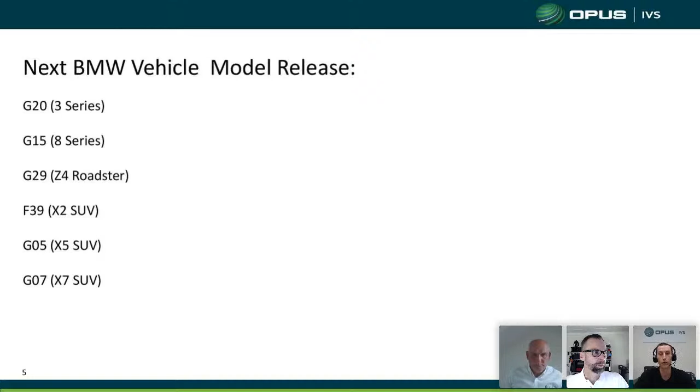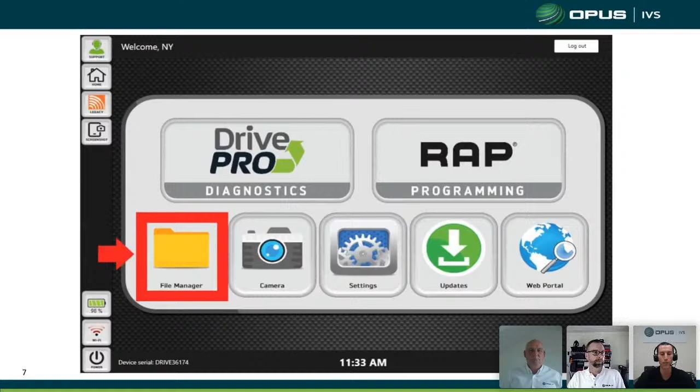Another question we've been getting a lot has been with regards to CIP. CIP is done through the legacy software, again that small orange button in the top left. Once a CIP order is created for a programming file, we go back to the main screen and go to File Manager. That's where we send and download the orders we've created through CIP.

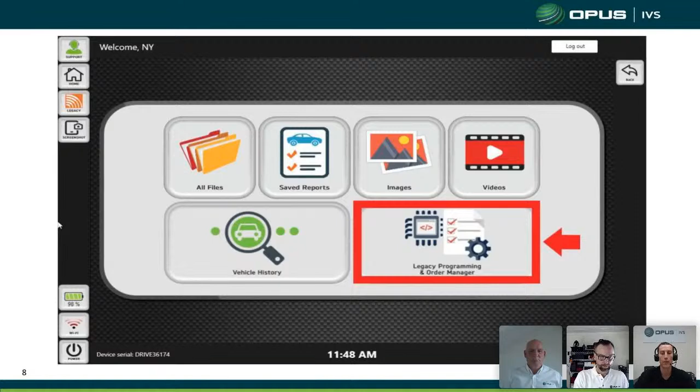Brian has kindly added some slides to walk us through the CIP process for both the E chassis and the F chassis. A lot of them will simply be prompts that you guys can read and follow, but we'll cover some of those now.

As we go into the CIP menu, there's going to be some confusion on the customer's end about what to do in terms of programming or coding possibilities. With the DrivePro ES, as well as our legacy tools BlueBox and AssistPlus, we have options: coding or programming an individual control unit, programming or coding a selection of control units, and doing a complete vehicle programming or coding event. The latter should pretty rarely be used, in all honesty. Primarily, you guys will be using the individual and selective coding and programming options.

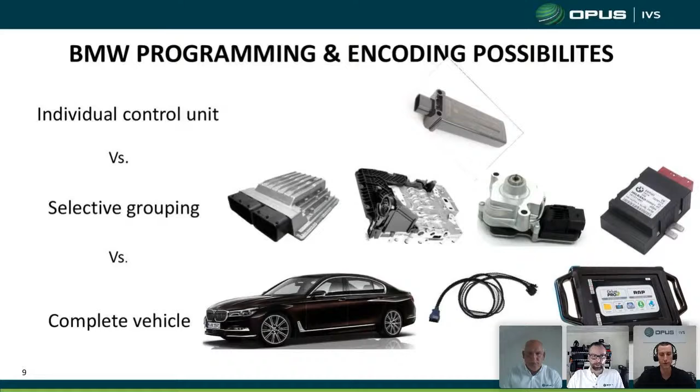The key thing here is if you're unfamiliar or unsure, it's important to just put in a tech support ticket with us and we can help you. If you're unsure whether a module needs programming or coding after replacement, we can help with that. Also, if there's a bulletin calling for a level update and we don't necessarily want to program the entire vehicle, we want to program an individual module that will help with the fault code or symptom being presented by the vehicle - that's where the technical support line is excellent, and we can always help you decide what options to choose.

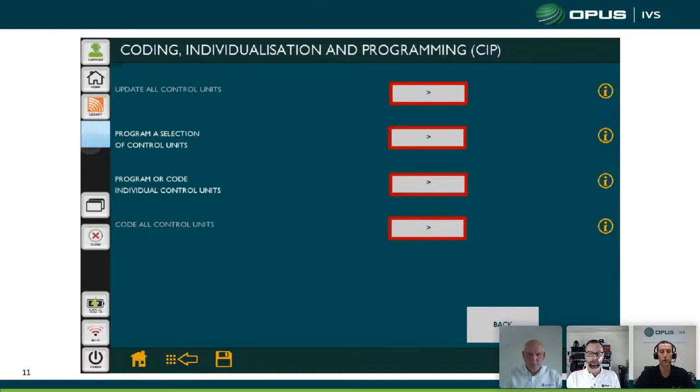Here on the screen, you can see the CIP menu for E-chassis vehicles, and here you can see the different options you have: program or code a selection of control units, or individual control units, or of course, coding of all control units.

Once you select the control units - let's say you selected a selection of control units - then you can choose body, chassis, drive, or you can physically select your individual control unit.

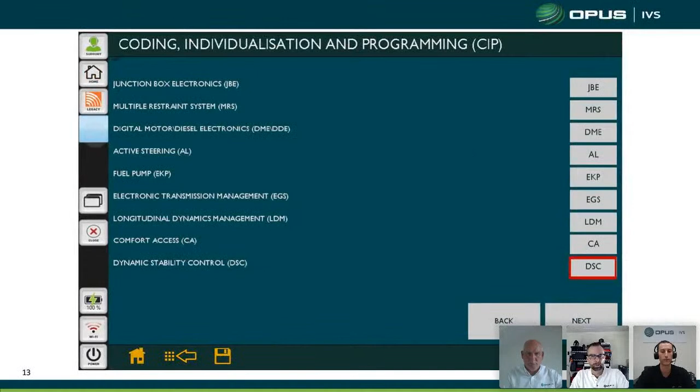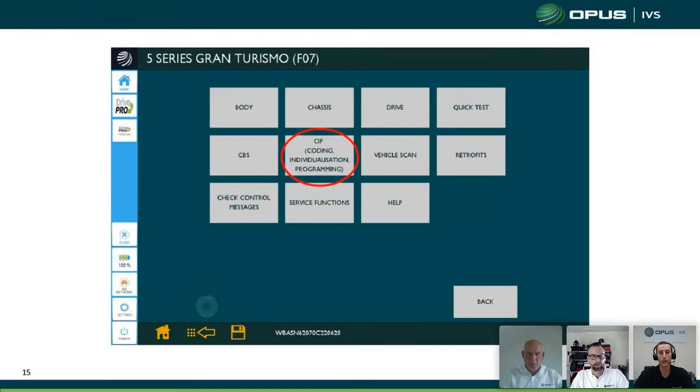When you move on to F chassis, the process is very similar, but the menus look a bit different. Here, once again, you'll go into the CIP menu, verify your version, accept the disclaimer, and follow the prompts. Prompts are all very self-explanatory - do read them, of course, and continue on through.

You will need an F chassis programming tool for F chassis. This did come with all of the DrivePros. It will have a white USB adapter.

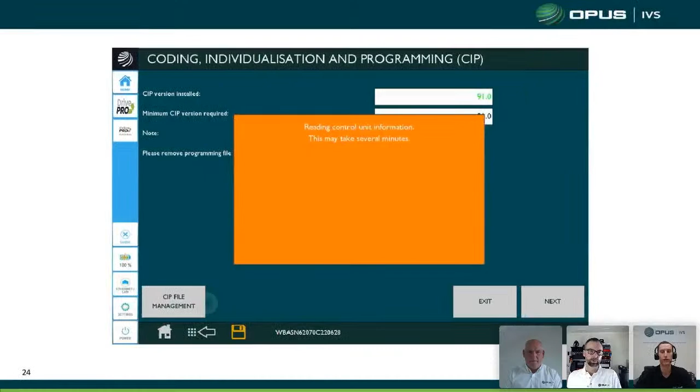The process will continue until you get to this page here, which is your status report. Read through the status report to see what updates are available or what coding or programming needs to be done if a module was replaced. Then simply close the status report using that X in the top right corner.

And here we have a picture of the vehicle order screen, helpful if you needed to confirm option code numbers or anything like this. The tech support group can also provide you with vehicle orders for BMW if needed.

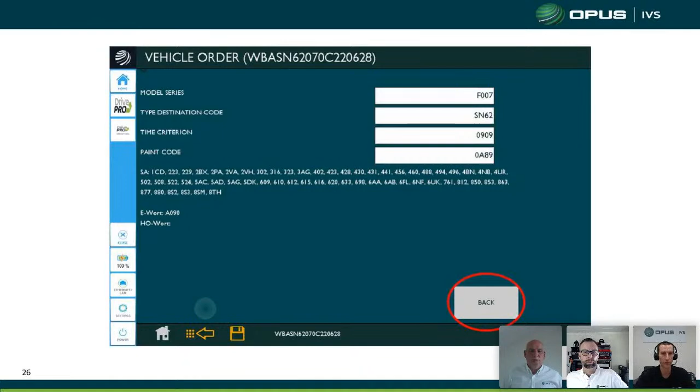And then we get to our menu here where we can change the measures plan, or we can select retrofits if we're performing a retrofit.

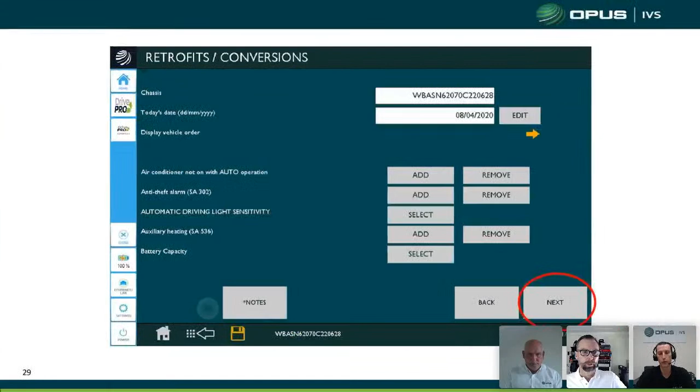Here we have a warning for retrofits and a list of the available retrofits. With retrofits, I would highly recommend that you contact the technical support desk before pressing buttons, as this is an area where you could easily get in trouble if you're unfamiliar with what you're doing.

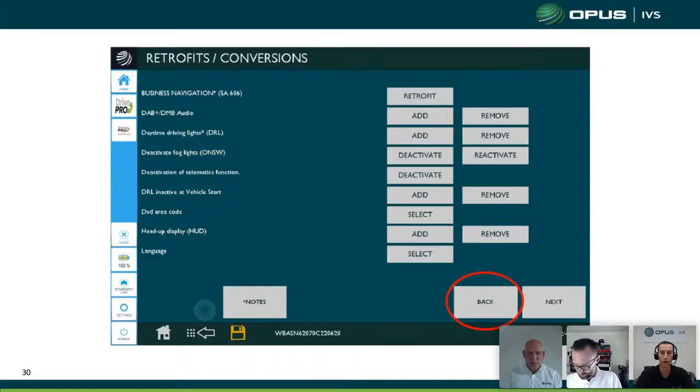Changing the measures plan would be if you wanted to create a measures plan for coding or programming in F-Series vehicles. Then, of course, you'll get your list of modules to scroll through and select what you want to do with each module. Pretty self-explanatory.

Program would be, of course, to program and encode the module, whereas code would be if you wanted to simply encode the module without programming. Programming will require a software order to be sent, whereas encoding would not require an order to be sent.

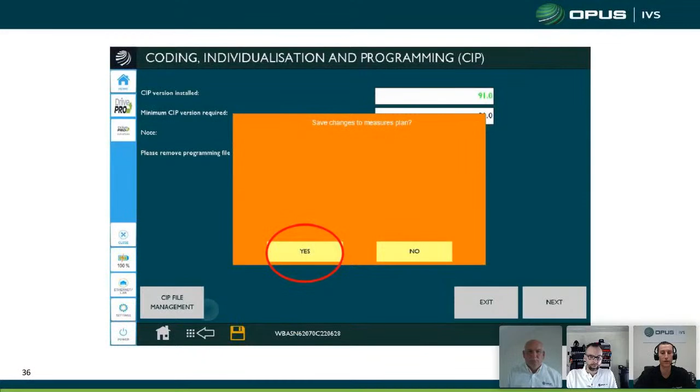Save that measures plan, and once the measures plan is saved, you'll get a prompt. You'll read the prompt, confirm that's what you want to do, and close it.

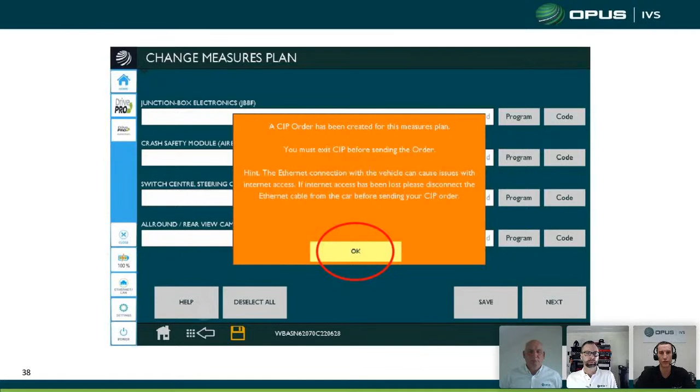You'll get a message that an order's been created. Once you get that message, that's when you want to go into the file manager and actually send and download the order once it's available.

With that said, I think I'm going to hand you back to Brian. He's going to cover a couple technical tips, and we'll go from there.

I'll take it. You're jumping in there early there, Brian. Hey, I'm supposed to be the host. What am I going to do if you guys skip over me? I won't be on there next week. It'll be your turn, Brandon, to get skipped over. All right.

Yeah, that was great information. We did cover that last month with the legacy button, and it's amazing how many calls we do get about that. It's just navigation and getting familiar with the new user interface.

I think, from my point of view, the legacy button is the old AutoLink emblem, which if you were a BlueBox user, that was to download software, not for diagnosis.

So I think if you don't have a connection to that link, you don't know what it is. And if you do have a connection, it doesn't really line up with what you're used to it doing. So, that's great, we'll just keep covering it as needed.

I expect that after this, we should probably see a decline in calls for that and just people getting some stuff done, which will be great.

Thanks again for the follow through and the walkthrough on programming. And yeah, like Brandon said, any issues you guys have, if you're questioning something, it's much better to ask us.

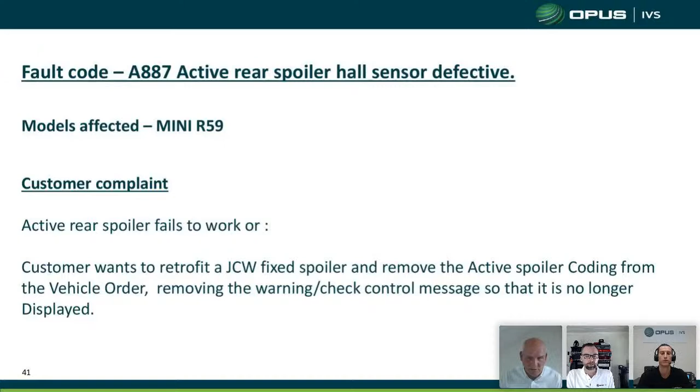The customer complaint would be the active rear spoiler fails to work, and the customer wants to retrofit a John Cooper Works fixed spoiler and remove the active spoiler from the vehicle. Normally it would have a hall sensor fault, or it could even have a motor fault on the rear spoiler.

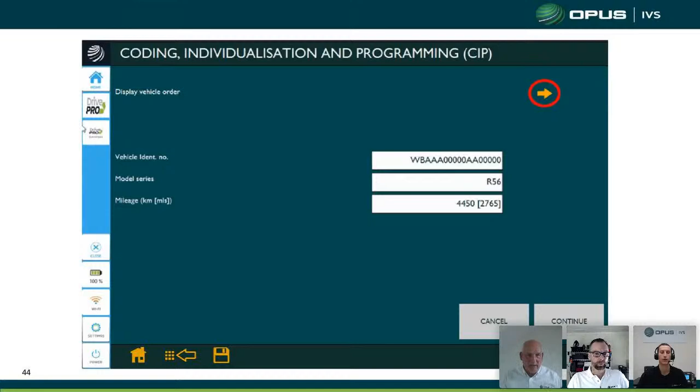To do that, we have to run CIP. Then in the CIP, when you go into vehicle order, we need to add SFIX in there. So this would be the screen you would get, and you can see it says display vehicle order. So we go into the vehicle order and under HO-Wort we add, in capital letters, SFIX here.

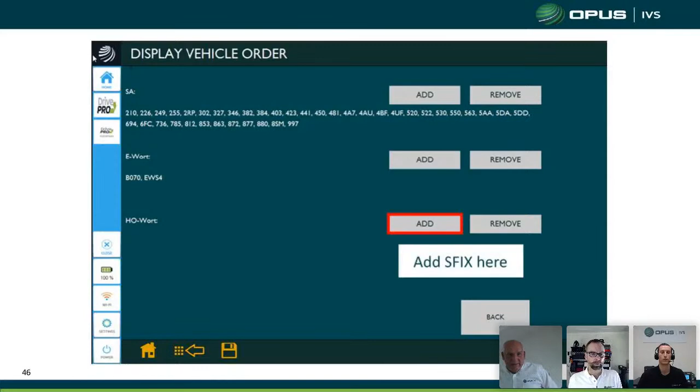So we add that into the vehicle order. I just wanted to repeat that screen just to make sure you knew exactly what you had to do afterwards. What you have to do is, once you go into HO-Wort and add this, you'll have a back button you'll press twice. If you press the back button 3 times, it will wipe off the HO-Wort you've added. It will take it out.

So if you went and continued on to the CAS, the FRM, the JBE, the Combi, and the DSC, to actually encode them, you will then wipe out the message, the actual SFIX in the HO-Wort - it would disappear. So we'll only press the back button twice to allow you then to continue on into the coding function, which will then allow you to code the CAS, the FRM, the JBE, the Combi, and the DSC.

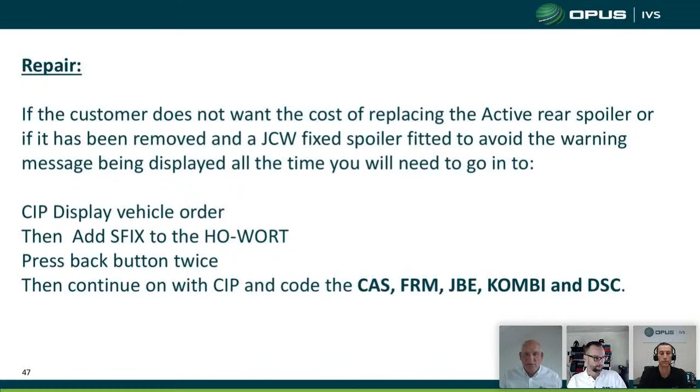So just be careful when you're pressing that back button, you only press it twice, then continue on into CIP. So that's that job completed.

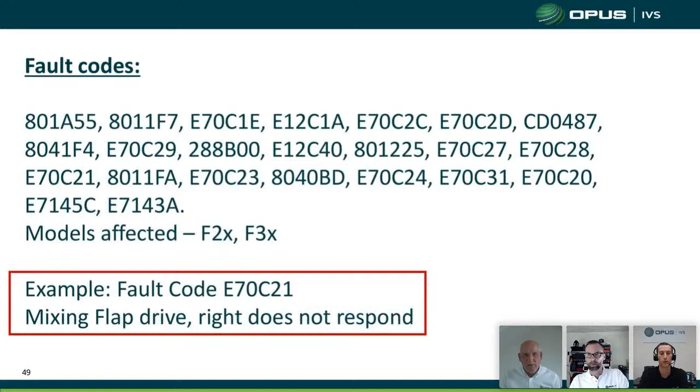One other one would be shorting of the wiring on IHKA. I just wanted to bring up an example here where fault codes are. These are the fault codes you would get, but I'll give you an example fault code: E70C21, mixing flap drive right does not respond. So that's just one of what could be listed. As you can see above, there's at least 15 up there.

You can see now the complaint. The complaint from the customer would be blower operation erratic or no operation of the blower, erratic heater control panel operation, no direction control when using the air conditioning system. The blower fan runs on after the ignition is turned off. Climate control stuck in hot, and various LIN bus fault codes will be stored.

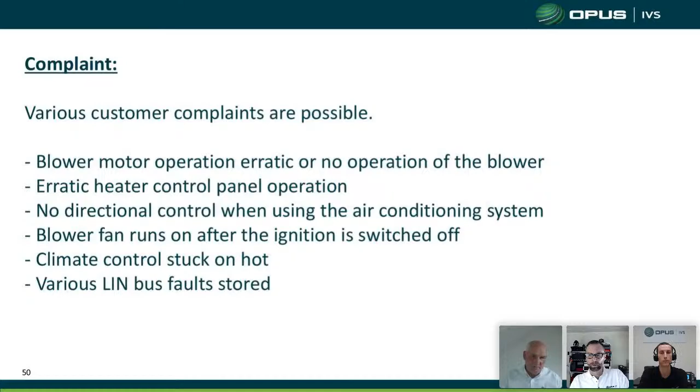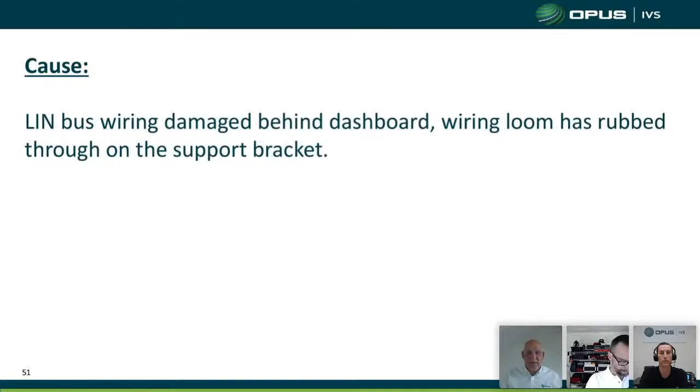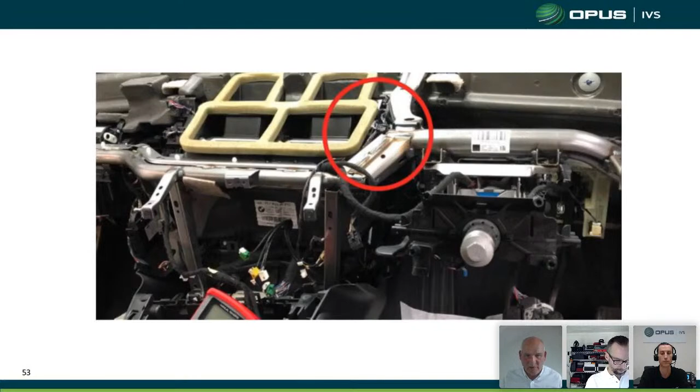I'm not complaining about this, by the way - this is just how manufacturing has gone on. And you'll notice that there are lots of sharp edges around the heater box area, the tubing that runs across the dash panel. So you can see there's lots of sharp edges. Anytime any wiring harness is moving while in transport, the vehicle could then have a short on it. And in this case, there is a short.

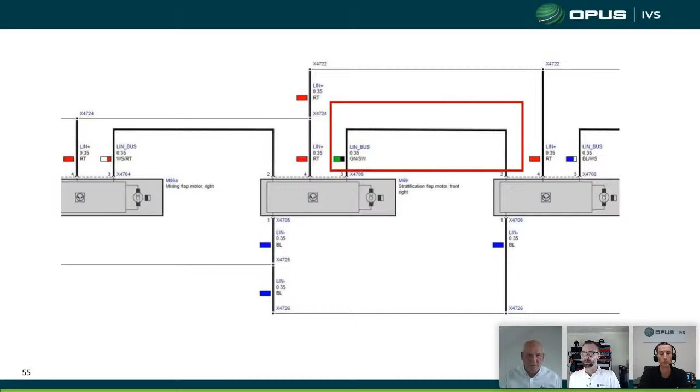So over to Brandon for the next technical update. Thank you. Actually, piggybacking off Brian's slide there, something I've been seeing quite a few cases on come through on the tech support desk is also a chafed wiring issue.

I've had several F30s either towed in because the vehicle owner cannot start the car, or driven in, but the vehicle will only start if the key fob is held against the emergency area for operation on the steering column, where that small white writing is. Some vehicle owners don't know to hold the key up there. If you do, generally the vehicle will start.

In the FEM, you will generally have fault codes for either one or both aerials - basically the antennas. I have generally seen this a lot with the front passenger compartment aerial. Its location is actually shown in the photo. It's right in front of the shifter, right before the cup holders.

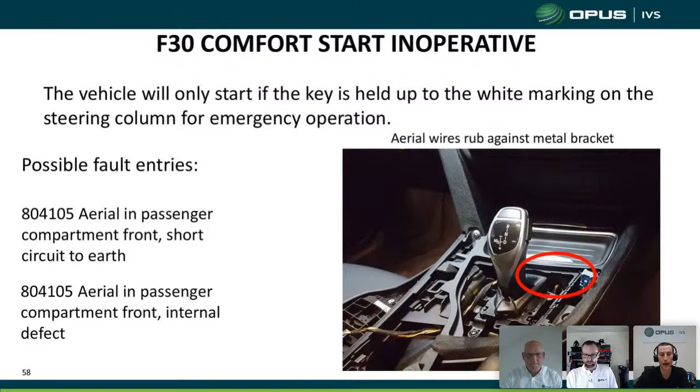That being said, one of the next topics I was going to cover is probably pretty well known in the field already, and this has to do with the N20 and N26 timing chains. These engines have been out for quite a while now, but the main reason I wanted to cover this topic was because of the wide variety of failures, as well as some tech tips to help you guys stay ahead of the pack.

So we're seeing, on both the N20 and N26 engines, elongated timing chains and broken guide rails. They can produce a variety of different symptoms, including rattling noise, sometimes scraping or scratching noises from the timing area. Oftentimes the chain is elongated. Another extremely common failure, probably one of the more common I've seen, is shown in the bottom left corner with that guide rail.

There are some plastic snap clips that break, and the two pieces of the guide rail actually come apart. Once that happens, all hell breaks loose - the timing chain loosens up, the chain gets elongated and stretched out, causing noise and potentially cam-crank correlation faults. I've also seen other faults set from an elongated timing chain, such as air mass faults. Definitely something to look out for. These are interference engines, so we get valve damage and metal circulating through the oiling system.

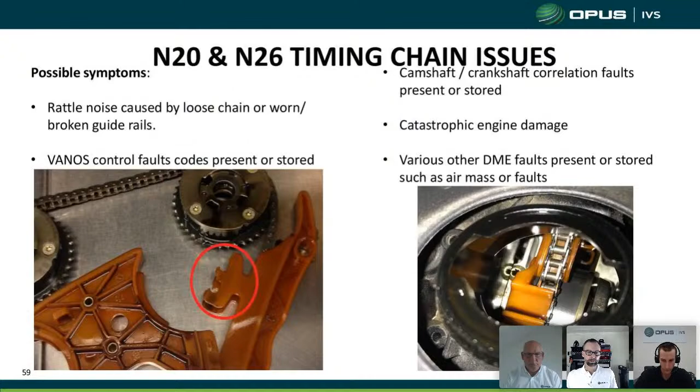Okay, there is a warranty on these timing chains. However, the warranty is only 7 years, 70,000 miles. So for most applications, this is going to be a customer pay job. But something to take note of if you are dealing with a lower mileage or newer vehicle.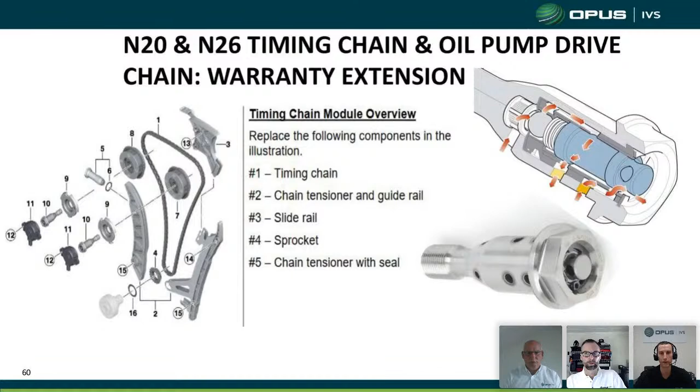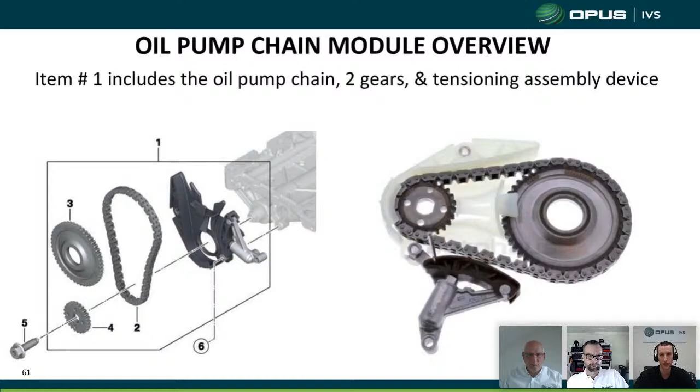Here we also see the lower chain, which is the oil pump chain. This comes as a chain module. It is also very important to replace this chain module, as I've seen a lot of failures of this chain as well. All pieces come as one part. You get the tensioner, the guide rail, and the lower chain with the sprocket. So definitely important to replace that, as well as the center bolt for the crankshaft there, which is a one-time use bolt. If you guys need repair instructions, torque specifications, assistance in checking the chain, of course, again, put in a tech support case and we can help you do that.

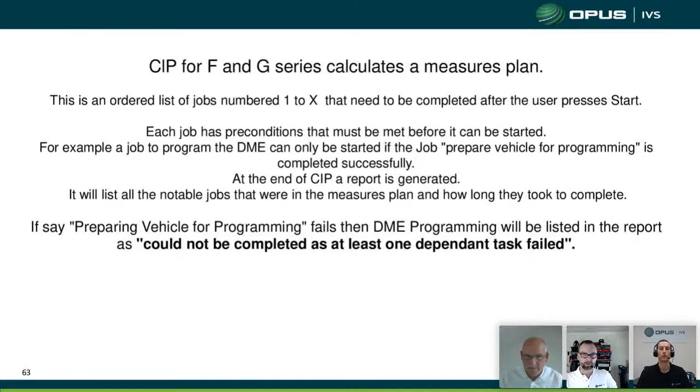Back to you, Eric. All right, thanks, Brian. So again, if you're sending in a log for an issue because you need something fixed to work on the car, it would be my inclination to send that in, and if you're also trying to address diagnostic feedback, send it in as well, they'll probably combine them anyway. But maybe in the special notes, put 'diagnostic feedback' so they're aware you're also reporting on a subject we've specifically asked for help on.

And then, as Brian alluded to, the hit list. Maybe some of you are going to get an old used ABBA Golden Hits dual CD, one that's really scratched, you never know. If that's something you really want, you might want to put that in, make that a consideration when you send that in. Or maybe not.

All right, so that's going to wrap up our update. We've done some updates, we've done some from the tech desk, we've talked about our diagnostic feedback. You guys have anything you want to add?

I just noticed someone's requested, are we updating the software across legacy and across DrivePro ES? And for BMW and for other brands, but we're talking about BMW today, the answer is yes, both softwares will be updated. The legacy software will still continue, and it will work across both platforms. So whatever worries you have, put them at ease, both platforms will definitely be updated when the software is increased.